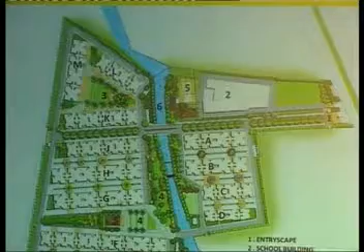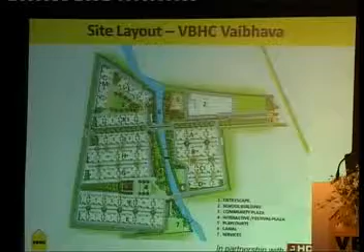That's the site layout - 2 bedrooms, 1 bedrooms and studios. Number 2 on the top right is the school. Number 3 is the community plaza, a nice open space around the shops on the triangle, so you can come out and have spillover space with activities there. We expect people in the apartments can spend very pleasant evenings there.

I think one of the central principles of Geddes that we are all very excited about is that the end goal of all planning is the joy of the community and the people who live within it. It's not buildings, it's not one thing. It's important that the well-being of the community is protected, and that's what we are focused on here.

Green footprint: 33% of the site is physically covered with green. 23.5% is buildings, and the rest is green cover and semi-porous surfaces, with a few hard-top roads. So the idea is to increase the green footprint and keep non-porous surfaces to the minimum.

I think what we've been keen on with the design is to ensure large windows for adequate lighting and good ventilation, because there's a need to have not just a room with four walls but a balcony or some semi-indoor-outdoor space. Every apartment comes with its own balcony.

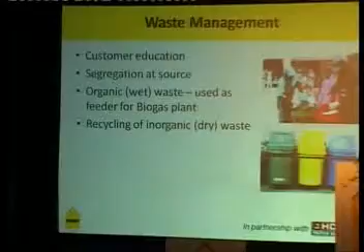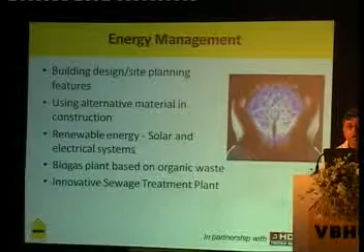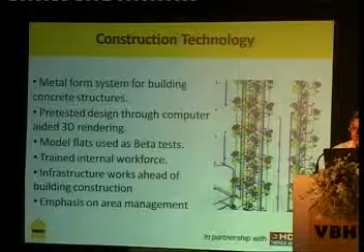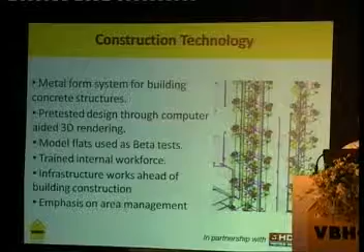Finally, we did discuss the construction technology, and you did see the slides on it, but before that, a series of processes. First, everything that we do is in 3D, and we have a completely visualized, simulated position of our project. So we can simulate, add something, and actually see how it looks, and get customers to have a view of it. The model flats that are used are beta tests, so by the time we come to actual construction, we've pretty much convinced ourselves that every element of it is in place.

Our infrastructure work, in terms of roads and all other facilities, goes ahead first. Traditionally, if you see the purchase plan laid out, it's plinth area, first floor, second floor, third slab, and so on—nobody speaks about infrastructure, and it often comes last. In our case, infrastructure comes first, and finally there's an emphasis on area management.

At this point, I'd like to conclude and acknowledge that a lot of people have helped us come so far, but a couple of people I want to mention specifically: Mr. Nagendran, General Manager of HDFC, and Gaurav Arya, my friend from HDFC PMS, who have been of great support in putting this program together for us. Also our suppliers, vendors, our consultants, our architects, and just about everybody, along with a lot of encouragement from people who have interacted in the media.

So with this, I'd like to conclude that we'll get the Vaibhava project up quickly, and we believe very strongly that people who live here will live happily ever after, and we stand true to the name of being high on value and low on budget. Thank you very much.